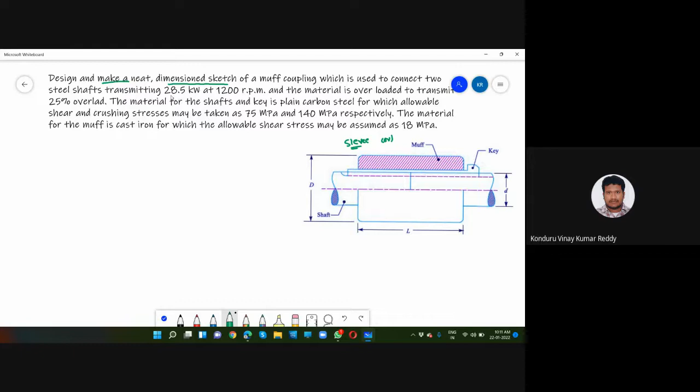It is connected to transmit 28.5 kilowatts of power at 1200 rpm. Here power has been provided, that is power is equal to 28.5 kilowatts, and rotations per minute, n value, is also given as 1200 rpm. The material is...

25% overload. That means torque maximum is equal to 1.20 into torque mean. Whatever torque we get from power and rpm is the mean torque, but we have to find the maximum torque. That is 20% overloaded, which is 100 plus 20 by 100, making 1.2.

The material for the shaft and key is plain carbon steel, that is they are made of the same material, having allowable shear and crushing stresses. Allowable shear stress of the shaft equals allowable shear stress of the key equals 75 megapascal, since both shaft and key material are made of carbon steel. Also allowable crushing stress, sigma C for shaft equals sigma C for key equals 140 megapascal. The material for the muff is made up of cast iron.

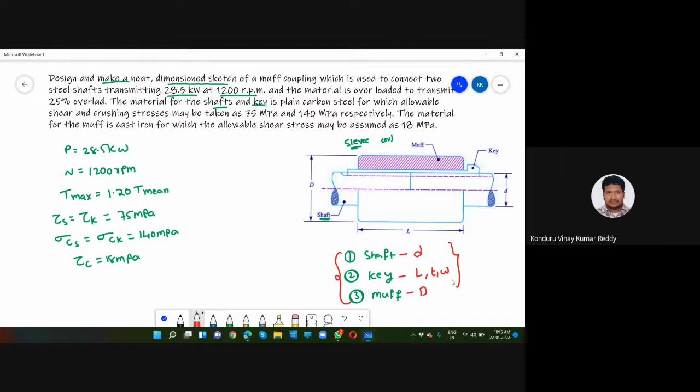D is the diameter of the shaft. L is length of the shaft, and length of the shaft or length of the muff - and if not, length of the key also you can consider. Capital D is the diameter of the muff. T and W are thickness and width of the key. Anyway, these two values we will assume, thickness and width.

Okay, let us try to solve this problem. First, we have to go for design of shaft. In order to design a shaft, we need torque. First we have to find the torque, then only we can design the shaft.

For finding torque with the given variables - the given variables are power and RPM, rotations per minute. By using these two, we have to design our shaft. The formula for finding torque using power and RPM is: Power is equal to 2 pi NT by 60.

In this formula, we have power, we have RPM. We have to find the T value. Whatever value you get for torque, that is mean torque. Mean torque is nothing but average torque. Average torque is equal to 60P by 2 pi N.

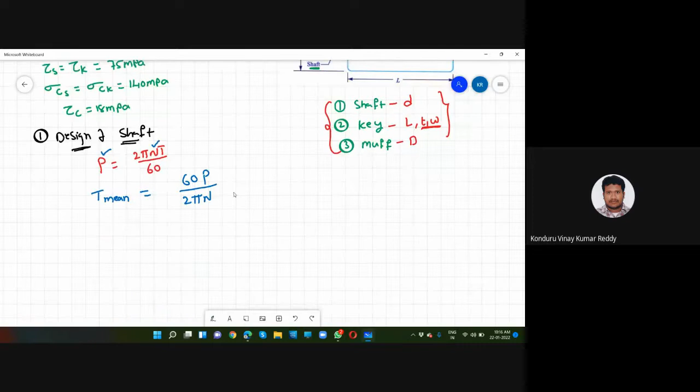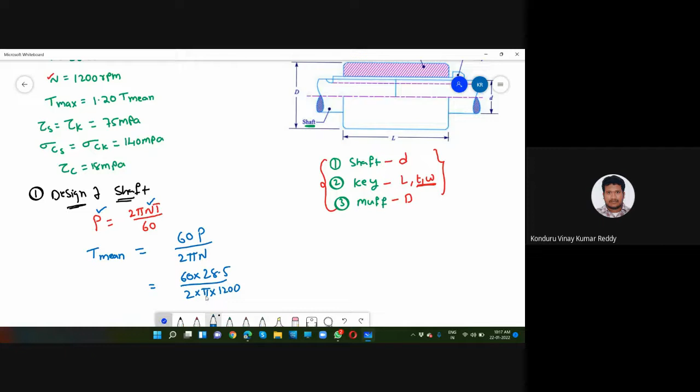Just substitute the values so that you will get your answer. Substitute the values: 60 into P value, which is 28.5, divided by 2 into pi into N, which is 1200. Just find out this answer and you will get your mean torque value. If you calculate, you will get the answer as 226.7 into 10 to the power of 3.

The value you will be getting is in Newton meter. You have to convert this value into Newton millimeter, so multiply by 10 to the power of 3. I have multiplied by 10 to the power of 3 so it has been converted into Newton millimeter.

Now I want to find maximum torque, not mean torque. Torque maximum is equal to 1.2 into torque mean, that is 1.2 into 226.7 into 10 to the power of 3. Thereby you will be getting torque maximum is equal to 283, and the calculated value will be 283 into 10 to the power of 3 Newton millimeter.

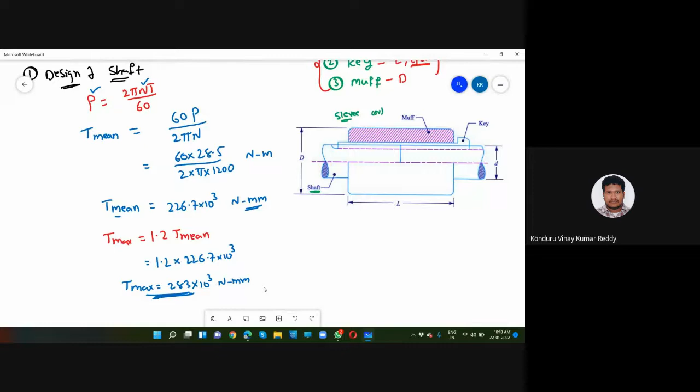This is our torque value. I got the torque value, thereby I can find out the diameter of the shaft very easily. The formula is torque is equal to pi by 16 d cube into shear stress.

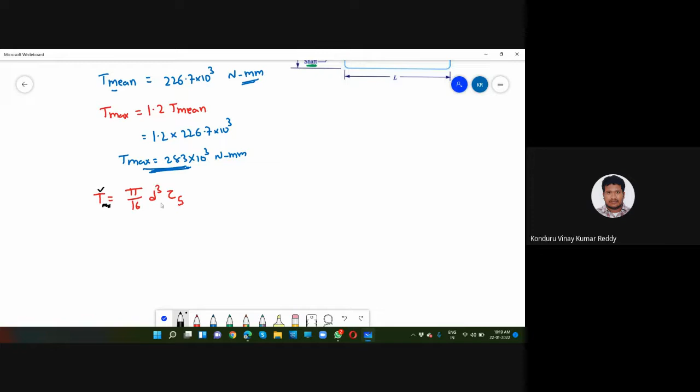As we are discussing regarding the shaft, this is shear stress of the shaft. Thereby we know what the torque value is; this is the torque maximum value you have to consider. We don't know what the d value is; d value we have to find out. So you have to find out the d cube value.

D cube value is equal to 16T by pi into shear stress for the shaft. That is, D is equal to cube root of 16 into torque value.

We have already found out the torque value, that is 283 into 10 to the power of 3, by pi into shear stress.

Shear stress in the question was provided as 75 megapascal. If you find out the answer, you will get D is equal to 30 millimeter. This is your answer.

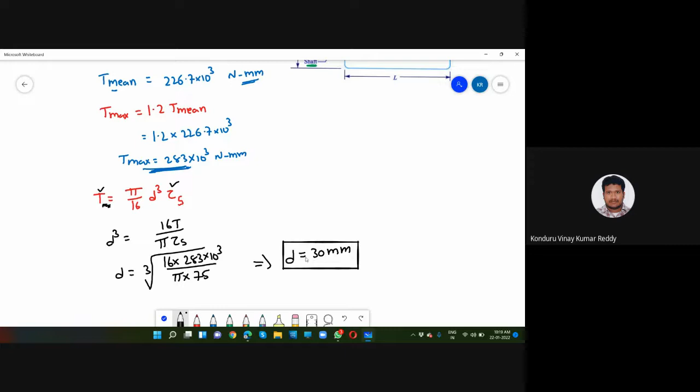After finding D value, we have to find capital D and also length values, that is length of the muff L and capital D, the diameter of the muff coupling. For this we have a relation as per the design data book: 3.5 into D is nothing but L, and capital D is nothing but 2D plus 13 millimeters.

That is, length is equal to 3.5 into D, and capital D is equal to 2D plus 13 millimeters. Now you will find the answer for this, and in the next formulas we will verify these answers.

L is equal to 3.5 into small d, where small d is 30 millimeter. So you will get length is equal to 105 millimeter. Similarly, capital D value is equal to 2 into 30 millimeter plus 13, so D is equal to 73 millimeter.

The thing is that we have to find out only three variables: first variable is small d, second variable is capital L, and the third variable is capital D. Strictly speaking, our answer is completed.

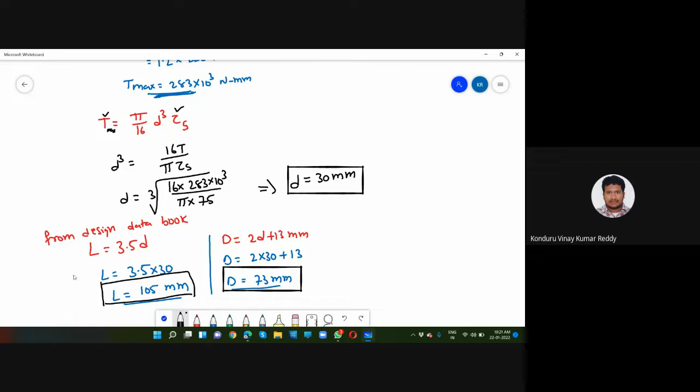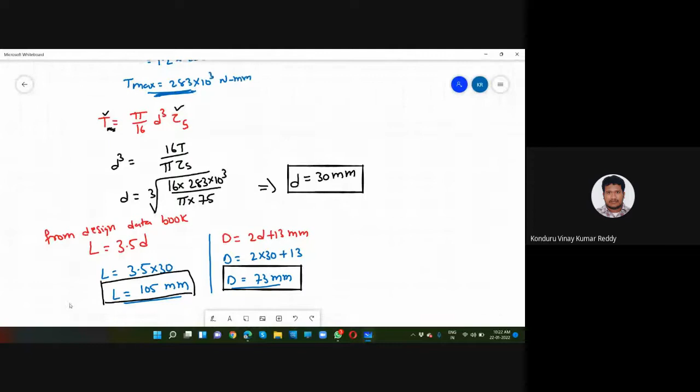But we have to verify whether we got our answers correct or wrong, so we are going to verify our answers. Here I am writing the three values: small d is equal to 30 millimeters, L is equal to 105 millimeters, and capital D is equal to 73 millimeters. I am going to verify these three values.

Whether these will satisfy the design conditions of the shaft or not, for that we will go for verification. Strictly speaking, we have completed our answer, but we are going to verify it. For verification, let us continue, we have a formula.

T is equal to, this is regarding the design of the coupling. In the notebook, we have written this case as formula number 2 or step number 2, as design of sleeve or muff or hub.

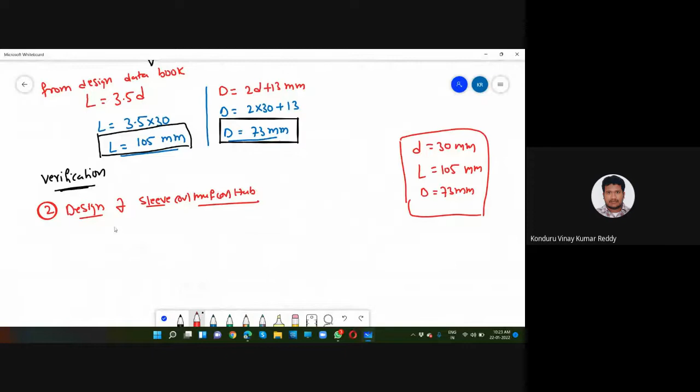Now for this we have a formula, that is torque is equal to pi by 16, capital D power 4 minus small d power 4, by capital D, into shear stress of the couple or sleeve or muff or hub. This is regarding shear stress of the sleeve, not the shaft. I have already derived this formula in the classroom, in your notebooks, you can verify from there.

In this formula, we know the torque value, capital D value, small d value, and even the shear stress value. But as it is a verification, we have to find this shear stress value only.

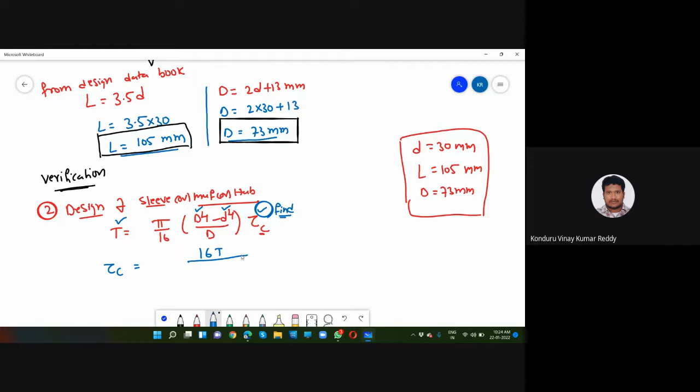Shear stress is equal to 16T by D power 4 minus D power 4 into pi. Now just substitute the values.

Shear stress is equal to 16 into torque value. Torque value we have got as 283 into 10 to the power of 3 by D power 4. D power 4 is nothing but 73 power 4 minus 30 power 4 by 30 into pi value. If you solve this, you will get shear stress equal to 3.82 Newton per millimeter square.

But in the question, it was given as 18 Newton per millimeter square. Thereby, it is far less than the value provided in the question.

Hence, our design is safe.

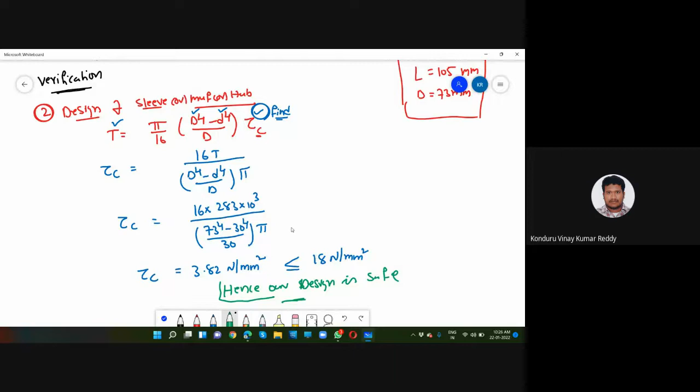How did I come to this conclusion? Because the shear stress of the couple is far less than the shear stress provided in the question, so that's how I arrived at this conclusion. Next, this is regarding the second part.

Similarly, we have step number 3 also. This is design of key.

As per the dimensions, the diameter of the shaft is equal to 30 millimeter. So we have to assume width of the key equal to 10 millimeter, thickness of the key equal to 8 millimeter.

If diameter is equal to 30 millimeter, you assume width equal to 10 millimeter, thickness equal to 8 millimeter. If diameter is equal to 70 millimeter, width should be equal to 20 millimeter, thickness should be equal to 16 millimeter. It goes on like this.

These two variables will be sufficient. Anyway, come to the question here. For designing a key, we have two formulas: torque is equal to length (L by 2).

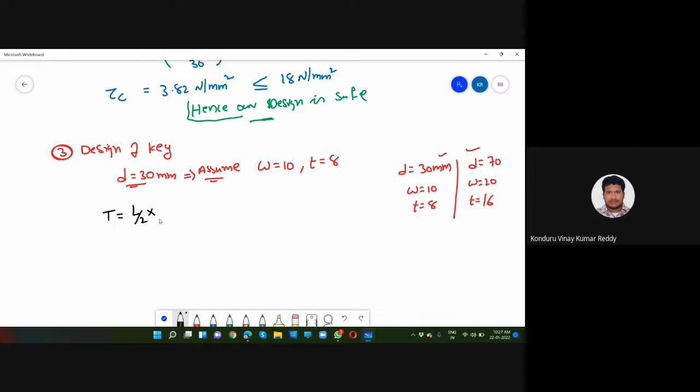Length of the key is nothing but half of the length. That is L by 2 into W into shear stress of the key into diameter by 2.

Similarly, one more formula we have: T is equal to L by 2 into T by 2 into sigma Ck into D by 2.

These values we have to find out. Here we have torque, length, width, and even we know the shear stress of the key, but we are going to find out the shear stress of the key only.

We know the diameter. In this formula also, we know torque, L, T, diameter, and even the crushing stress. Still, we are going to find out the crushing stress.

Shear stress of the key is equal to T by (L by 2 into W into D by 2). Similarly, crushing stress of the key is equal to T by (L by 2 into T by 2 into D by 2). Just substitute the values.

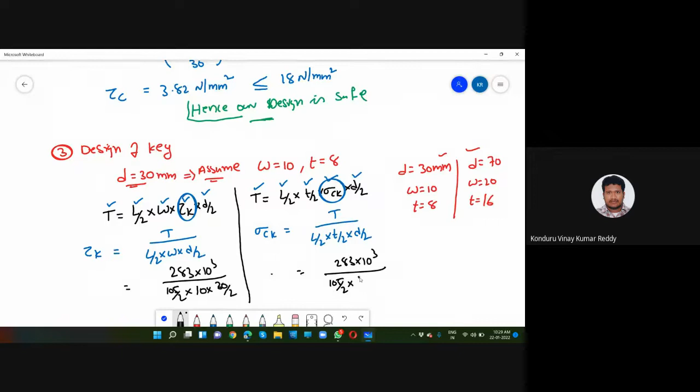Shear stress of the key is equal to 283 into 10 to the power of 3 by L by 2, which is 105 by 2, into width 10, into diameter 30 by 2. Similarly, for crushing stress: 283 into 10 to the power of 3 by L by 2 (105 by 2), into 8 by 2, into diameter by 2 (30 by 2). Now find your answers.

Shear stress of the key is equal to 36 Newton per millimeter square, and crushing stress of the key is equal to 90 Newton per millimeter square.

This should be less than 75, and this should be less than 140. As these are less than those values, hence our design is safe.

Any doubts up to here? This is regarding our muff couple.

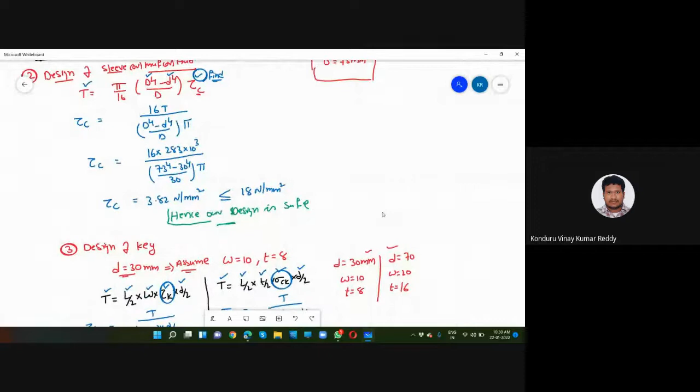Similarly, you will be having split muff coupling also in the same way.

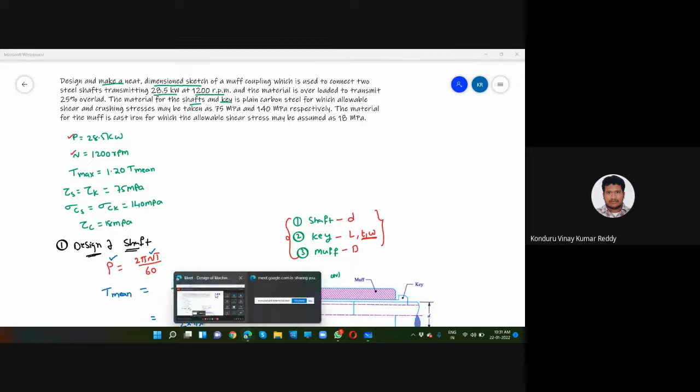Any doubts up to here? No, sir. Okay, anyway, I will...